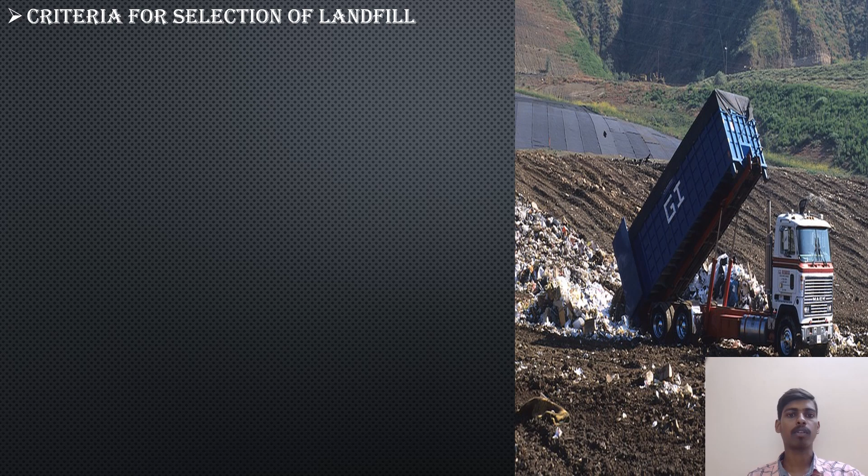Today our subject is Introduction to Civil Engineering, topic Urban Floods. In that, the first one is criteria for selection of landfill. Geology: a landfill should be located in areas with a low risk of groundwater contamination. Land use in the site selection process: forests, vineyards, and gardens, as well as agricultural areas, should not be included.

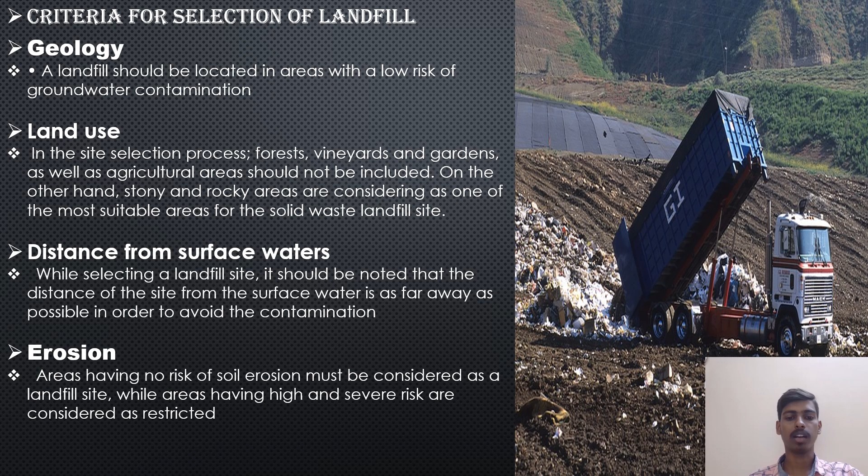On the other hand, stony and rocky areas are considered as one of the most suitable areas for the solid waste landfill site. Distance from surface waters: while selecting a landfill site, the site should be as far away from surface water as possible in order to avoid contamination. Erosion: areas having no risk of soil erosion must be considered as a landfill site, while areas having high and severe risk are considered as restricted.

Distance from fault zones: areas closer to fault zones are considered as higher risk areas as it can contaminate the groundwater. Distance from cities: solid waste landfill should not be located close to people since they might cause different types of pollution. For this reason, landfill construction should be implemented far away from the cities.

Distance from highways: the distance from the highways is significant in the sense of transport costs. The transport costs of the solid waste increase while moving away from the highways; however, being located nearby the highways might cause odor and other related pollution. For this reason, a moderate distance from the highways should be considered.

Slope: slope is the basic criteria for landfill site selection. High slope areas are not suitable for a landfill site due to construction cost and the probable mass movement hazards. For this reason, areas having lower slope degrees should be considered.

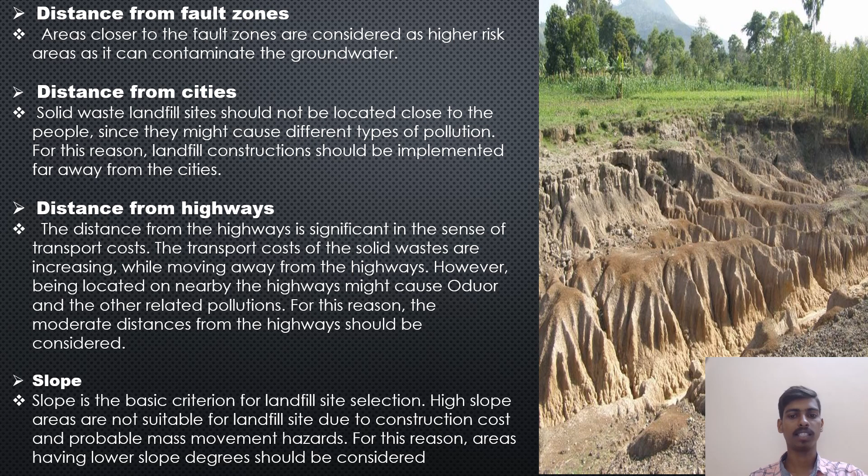Criteria for landfill site selection. First one, distance from population centers. Second one is geological and hydrogeological factors. Third one is accessibility and transportation. Fourth is land use compatibility. Fifth one is environmental impact assessment, we can call it EIA. And the sixth one is capacity and long-term planning. These are the very important landfill site selection criteria.

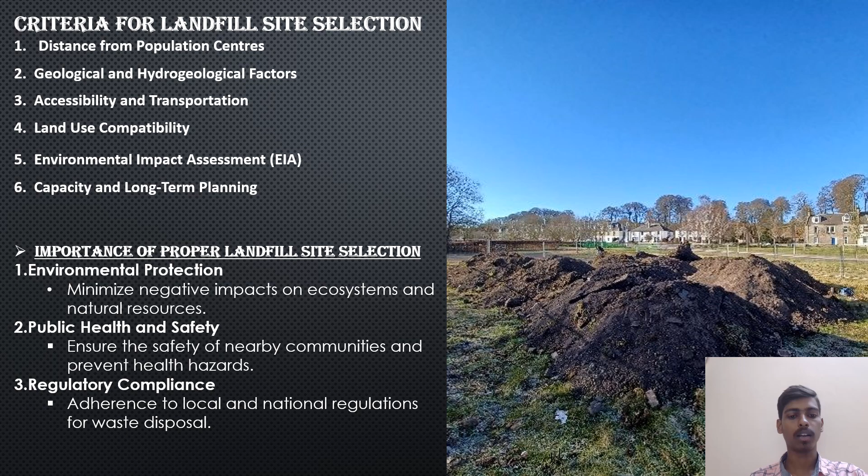And the importance of proper landfill site selection. First is environmental protection: minimize negative impacts on ecosystems and natural resources. Second one is public health and safety: ensure the safety of nearby communities and prevent health hazards. Third one is regulatory compliance: adherence to local and national regulations for waste disposal.

Urban flood control. Urban flooding describes the flooding of land or property in a constructed environment, especially in locations that are more densely inhabited like cities, as a result of excessive rainfall that exceeds the capacity of drainage systems. Urban flooding is significantly different from rural flooding as urbanization leads to developed catchments which increase the flood peaks from 1.8 to 8 times and the flood volume by up to 6 times.

Consequently, urban flooding occurs very quickly due to the faster flow times, in a matter of minutes. Urban areas are densely populated and the people living in vulnerable areas suffer due to flooding, sometimes resulting in loss of life. It is not only the event of flooding but the secondary effect of exposure to infection that also takes its toll in terms of human suffering, loss of livelihood and, in extreme cases, loss of life.

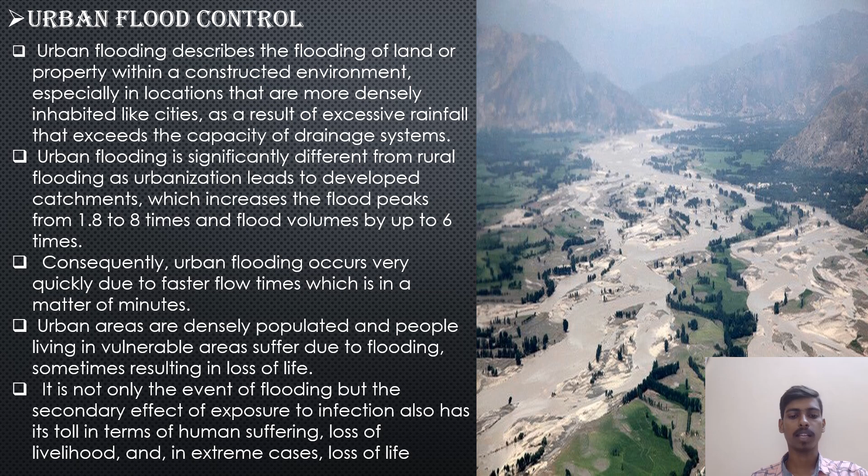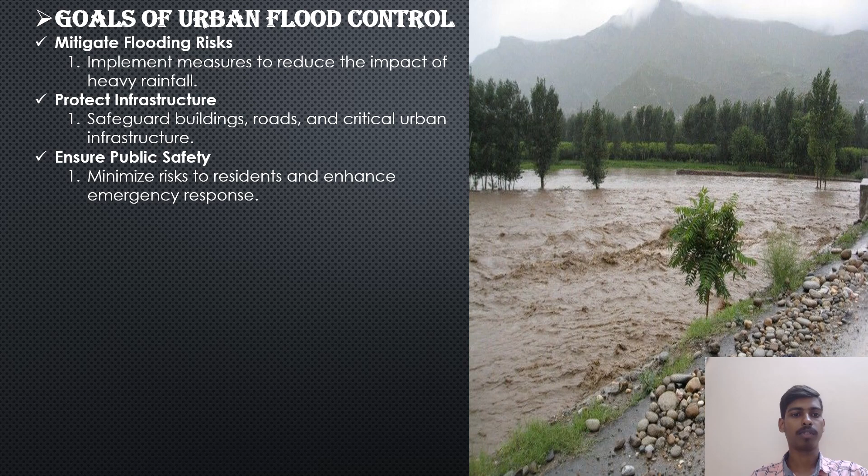Goals of urban flood control: mitigate flooding risks, implement measures to reduce the impact of heavy rainfall; protect infrastructure, safeguard buildings, roads, and critical urban infrastructure; ensure public safety, minimize risks to residents and enhance emergency response.

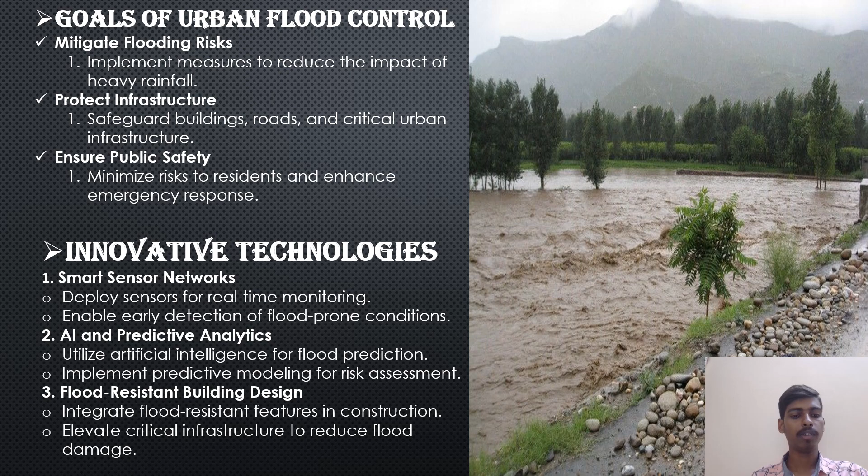Innovative technologies: smart sensor networks, deploy sensors for real-time monitoring, enable early detection of flood-prone conditions. Second one is AI and predictive analytics: utilize artificial intelligence for flood prediction, implement predictive modeling for risk assessment. Flood resistant building design: integrate flood resistant features in construction, elevate critical infrastructure to reduce flood damage.

Causes of urban flood: higher rainfall, storm surges, and frequent depressions in open waters, depleting groundwater tables, heavy melting of snow causing flash floods in lower catchment areas, rising sea level due to global warming, encroachments on drainage areas like lakes, wetlands, and river beds close off ways for the excessive water to flow, thus causing floods.

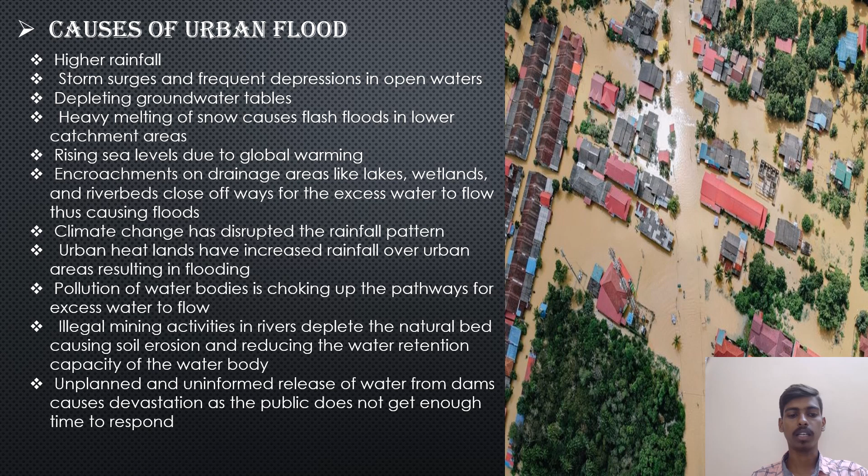Climate change has disrupted the rainfall pattern. Urban heat islands have increased rainfall over urban areas, resulting in flooding. Pollution of water bodies is choking up the pathways for excess water to flow. Illegal mining activities in rivers deplete the natural bed, causing soil erosion and reducing the water retention capacity of the water body. Unplanned and uninformed release of water from dams causes devastation as the public does not get enough time to respond.

Mitigation strategies. First one, improved drainage systems: upgrade and maintain stormwater drainage infrastructure, implement sustainable drainage solutions. Second one is green urban planning: incorporate green space in urban development, promote permeable surfaces. Climate resilient infrastructure: design infrastructure to withstand extreme weather events, consider future climate change projections.

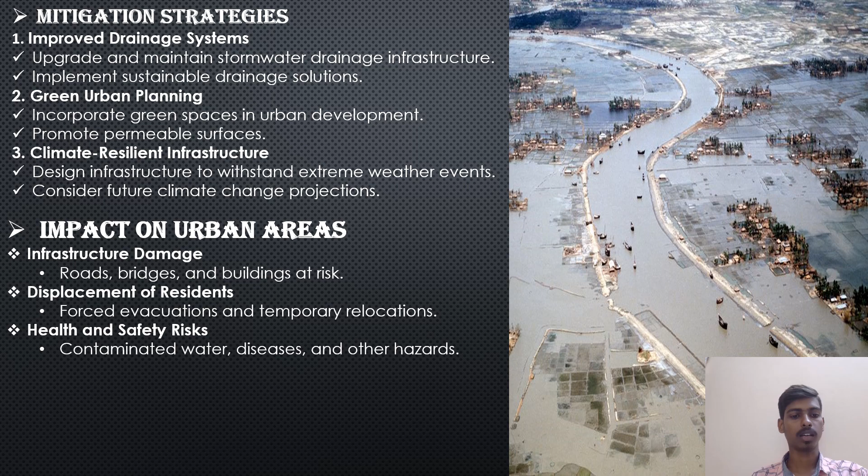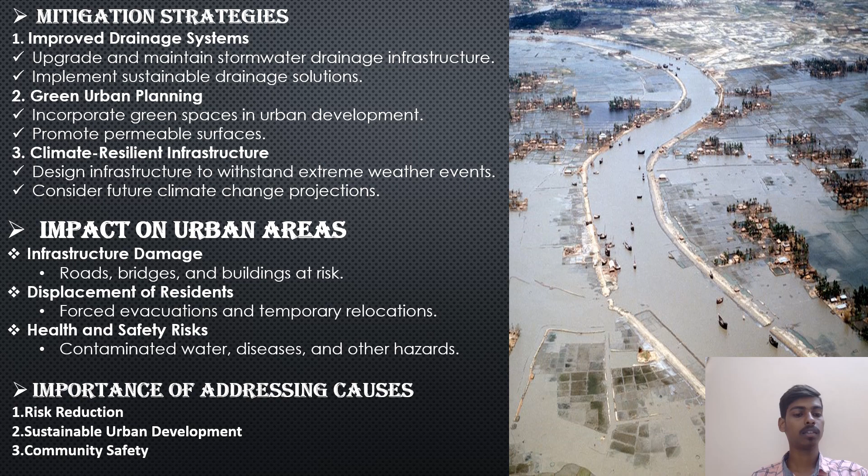Impact on urban areas. Infrastructure damage: roads, bridges, and buildings at risk. Displacement of residents: forced evacuations and temporary relocations. Health and safety risks: contaminated water, disease, and other hazards. Importance of addressing causes: risk reduction and sustainable urban development, community safety.

Controlling methods. Build away from the floodplains and flood prone areas. This is the best way to ensure less loss of life and property. The development of blue green infrastructure will be effective in providing sustainable solutions to urban climate challenges. Better water management should be ensured, like including rainwater harvesting in all infrastructure developments. Geospatial technology should be utilized for flood vulnerability mapping, which will aid in better planning for development.

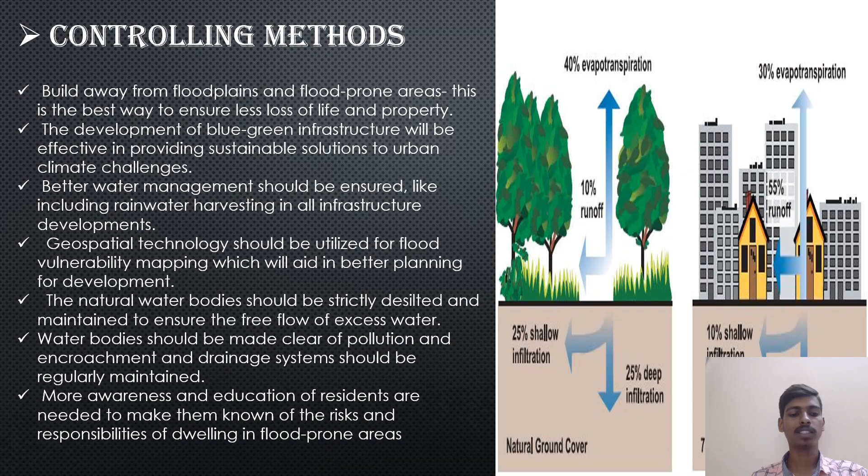The natural water bodies should be strictly desilted and maintained to ensure the free flow of excess water. Water bodies should be kept clear of pollution and encroachment, and drainage systems should be regularly maintained. More awareness and education of residents are needed to make them know the risks and responsibilities of dwelling in flood-prone areas. Thank you for watching, and please like, comment and subscribe.